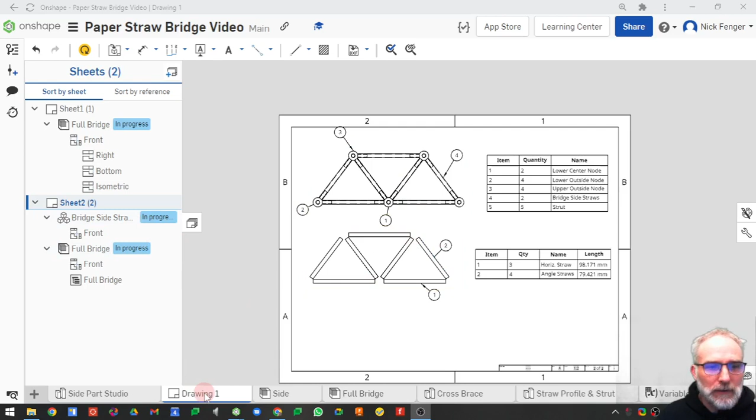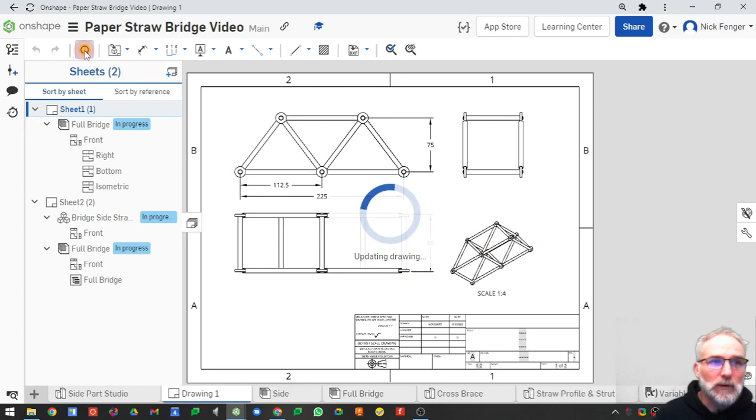I went back to our drawing tab, and I've got our full bridge here. Notice if I go to the full bridge, it's missing the cross bracing, and our little update icon is orange, meaning there have been changes to the drawings or the project that have not been reflected in the drawings. So we're going to click update from the workspace, and it's going to bring in our changes. We should see our cross bracing show up. Sure enough, there it is. Lovely.

And then we need to go to our other sheet, and you can kind of see it up there now. Look, we have part number 6, quantity 1, cross brace.

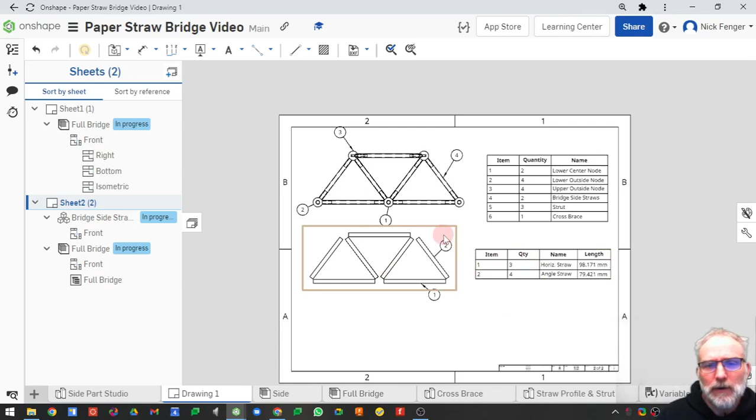So we can't see that here, but we're going to add the cut list. Remember, this is a bill of material, BOM, from an assembly, listing all the things in the assembly. These are cut lists from the part studios that made these parts. Really handy to have this. This is pretty new for Onshape - when I first started doing this project, it was a lot more difficult.

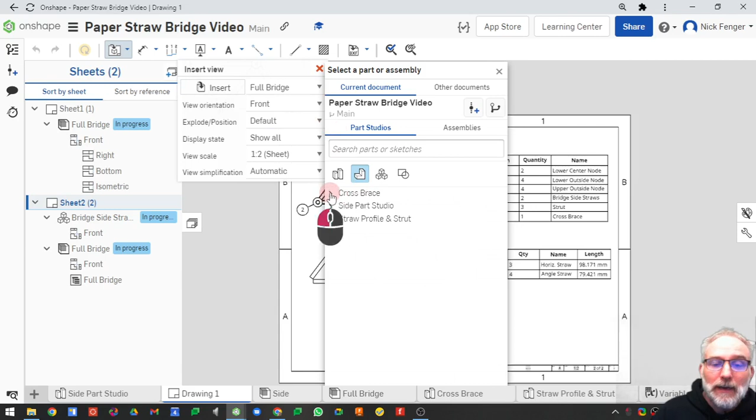So we're going to insert a view, and it's going to be a new view. We're going to choose - that's not obvious here right now, it says oh, we've got these already in here. I guess you want the drop down. It doesn't really say this is a new one, but we want that. Pick our cross brace - now here we can pick our composite part that has the whole cross brace. That's what we want. These are all just the parts individually, and we can bring that in here.

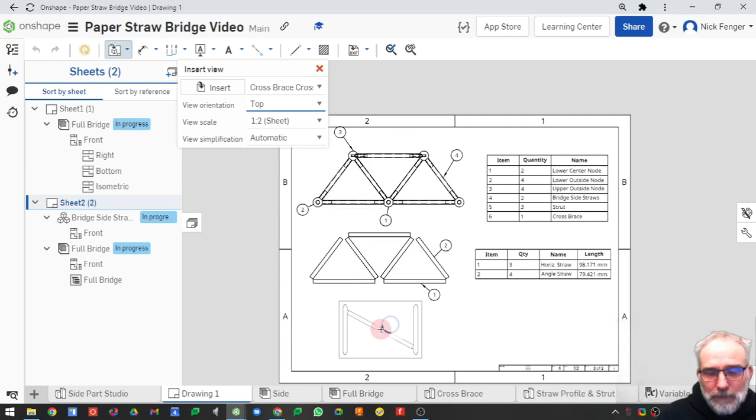Now it's the wrong view. I want the top view of it, so we'll switch that. Click here.

Okay, I definitely want to make some changes. I want to show the parts, so I'm going to hit Escape, right click, and then I want to show hidden lines. We'll show my tabs - I want to see that I've got tabs in there.

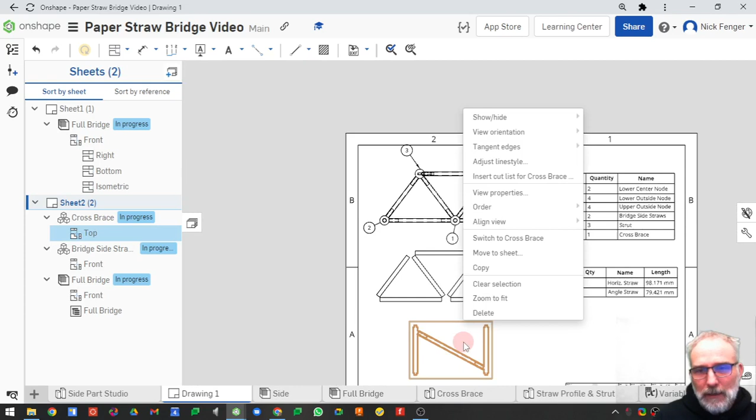And now right click, I want to insert the cut list for the cross brace. Oh, and you know what - before I do that, I've got too many columns, I think. No, maybe I don't, hang on. Oh no, I've got longer names, that's why, thought I had. If you have angle on here, you've got to go back to the cut list and remove those.

Okay, so here we go. If you want to move this around, by the way, you've got to click on the corner. And let's do our callouts, which - nope.

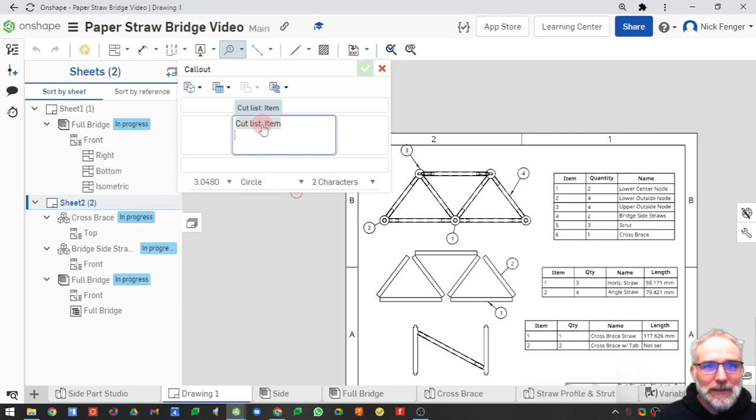Part of the cut list is the callout. Make sure it says cut list item - if it doesn't, pick that. Remember, we have two types of things, BOM and cut list, so we want cut list item.

Now we can click on there. That's number 2 - I'm not going to number that since it's identical, and you see there's quantity 2. It should be intuitive. And that's item 1, the straw.

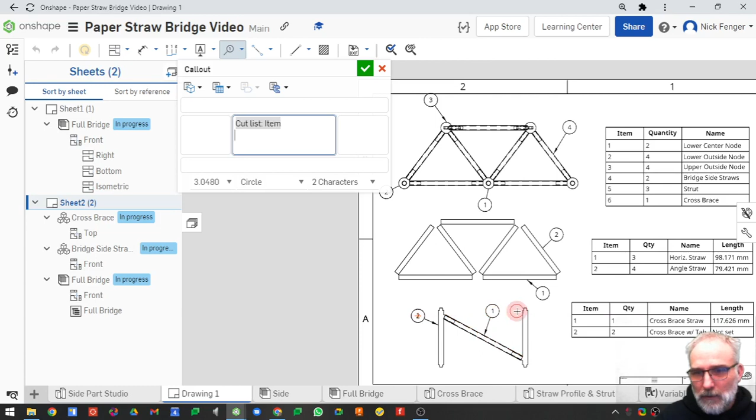There we go. Now we have all the parts, and basically you can hand this to somebody and they could use the BOM table. Notice I only have 1 cross brace here, 2 bridge side straws, which we have here, 1 cross brace. Now you can name those differently if you have more.

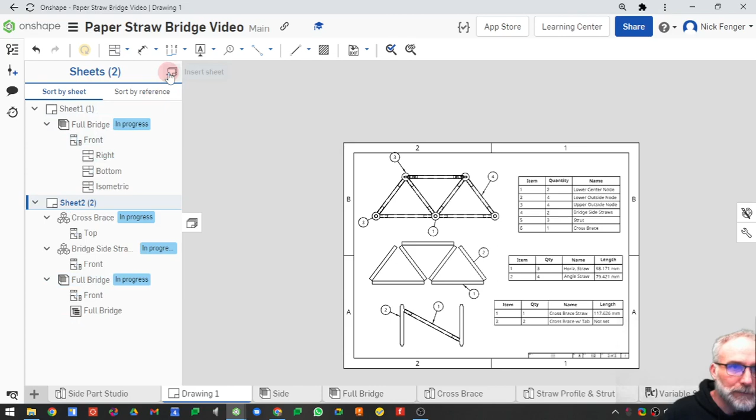If you have more, you can create another sheet up here and continue on for your other cross braces, and it's going to number those pages here. So we've got our full bridge, first page. It has our full bridge.

I did do a little dimensioning last time, between the last video and now. Let me just show you how to do that real quick. It's very easy - click on the dimension tool. You've got a lot of options here. The straight dimension tool works pretty well. I did dimension the node spacing, so I just click on the center, and you get that lovely dimension.

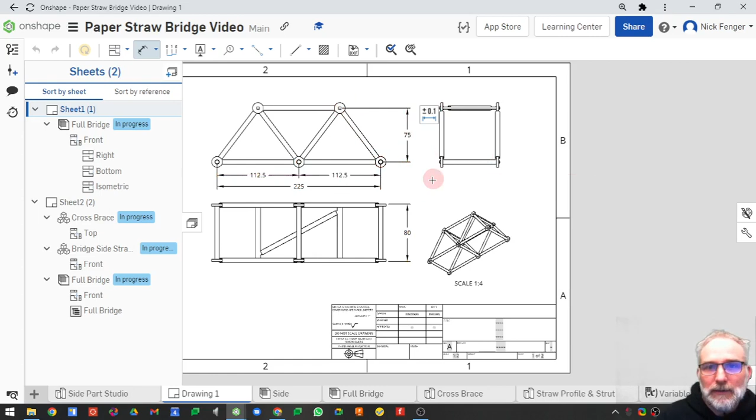Same thing here, center to center gave me that 75. Again, you don't have to do redundant dimensioning. I really didn't need to do that second one there. Remember, I'm only doing part of the whole bridge.

Now the cross brace doesn't really need more since we have all of the dimensions of these straws in the cut list. So here I'm just showing some overall dimensions of the bridge. Notice these are lined up, so I only need to do one there, I got my bridge width. I want to show that I'm meeting the spec. That's the really important part of this dimension.

Don't need a lot more. You don't need many more dimensions on here. One thing I am going to ask you to do is to create a dimension node.

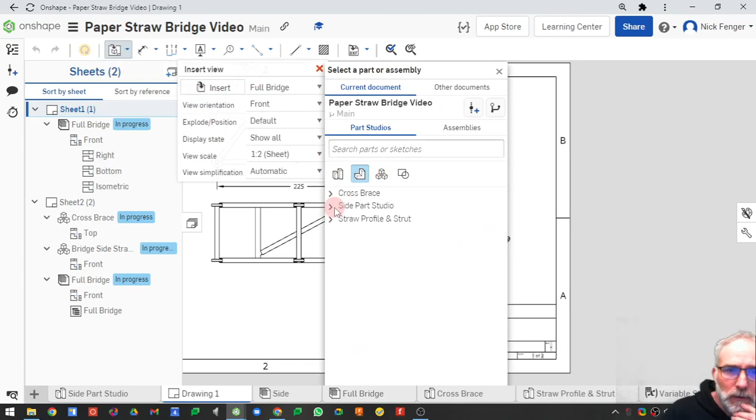So we could add that to the bottom here. We've got some room. Let's just insert a node, insert view. I want to pick a new one, and let's go to the side, and let's just grab one of my nodes so I can give you a general idea. Let's grab this one. Here we go. And let's grab one more so I can show the notched one.

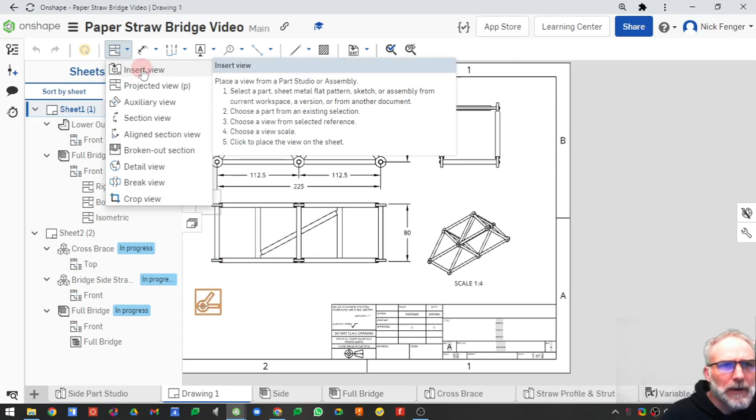You could, if you had room on your other one, you could do it on there, or do another sheet. I'm just doing it here since I have room. Insert view.

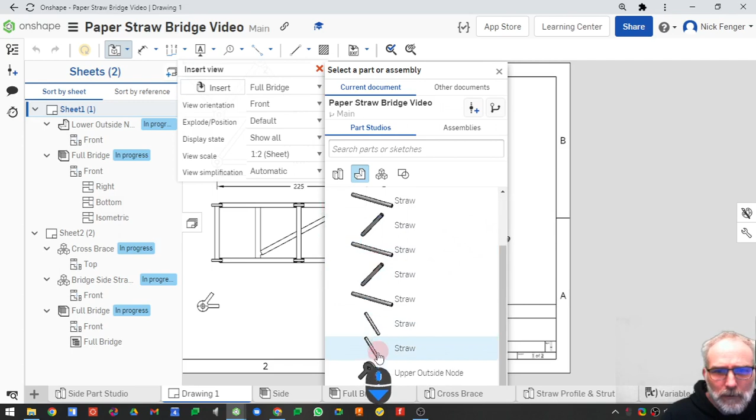Side part studio. Okay, I need to do it again. So I want to go to the side part studio, and I want to grab one of the top nodes with a notch. Here we go.

And I can make these a little bigger so I can see the dimensions a little bit better. So let's, actually I could have done that. Escape. I want to double click on it, and we'll go 1 to 1 and make it bigger.

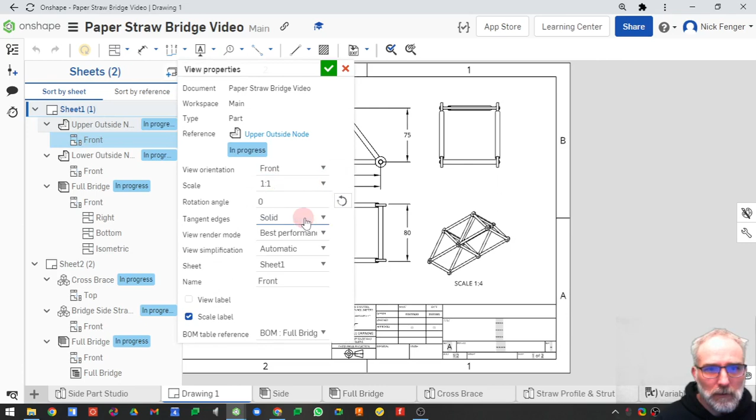There we go. Notice it's showing the scale on the items that don't match the sheet scale. The sheet scale is down here. So it's saying this scale is 1 to 2. So if you do things differently, it's going to show that they're different. So double click, I'm going to do 1 to 1.

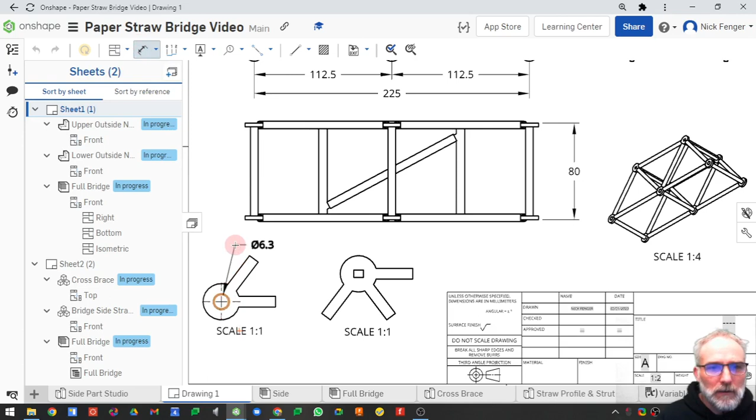Now I can show a few things here that are like, how big did you make your hole here? Some people adjusted that dimension to 6.3 to make the straws fit better. This one, how wide did you make it? Well, we probably guess you made it. No, we don't know how thick you made it, so we'll do that. There we go.

What were your straw tab thickness width? And what were your straw tab lengths? Again, only need one of each if you used all the same. So that gives you a little bit more information about the nodes.

Sure, we could do the diameter of the outside. That's going to be the same there. So it's pretty much fully dimensioned. Everything else we can get from the bill of material or the cut list.

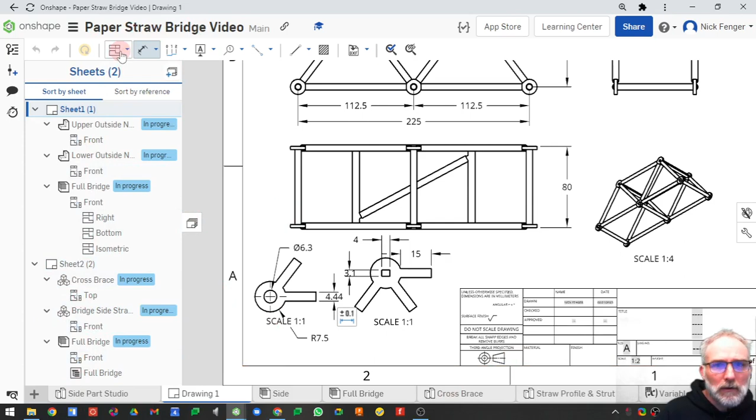So that's going to give you your complete drawing set, basically everything someone would need. Of course they're going to need the Kiri:Moto export too, right? They can't do everything, but this gives someone an idea. Oh, they're building your bridge.

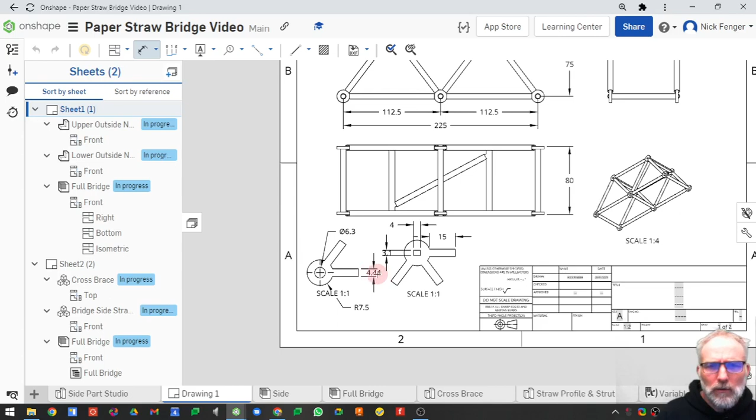Wow, your straws are fitting really tight. Oh, I see you used 6.2 instead of 6.3. Or your nodes, oh, I used 4.44 and they're really loose, so maybe we'll change that. So this would be something you would use to kind of validate the design.

Someone else might be building this and they want to know. So that's what we have. So sheet 2 then would have our person who's cutting these straws out. They're going to know, they can number these, and you can reference these when you assemble it. So these give you lots of tools for that.

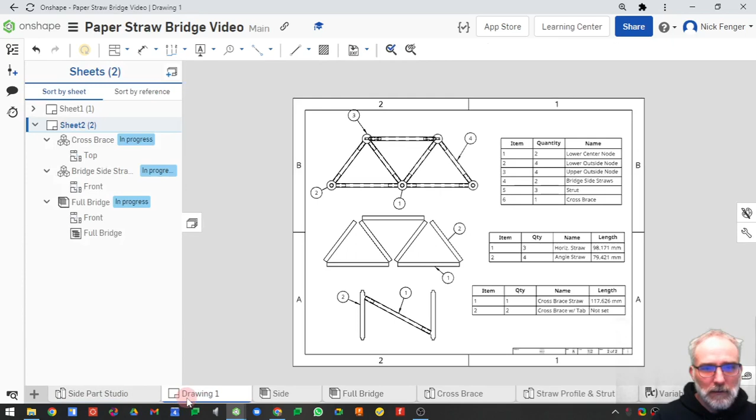All right, that ends our cross bracing video. We've got our cross brace, we've got our drawings that include everything all ready for you.